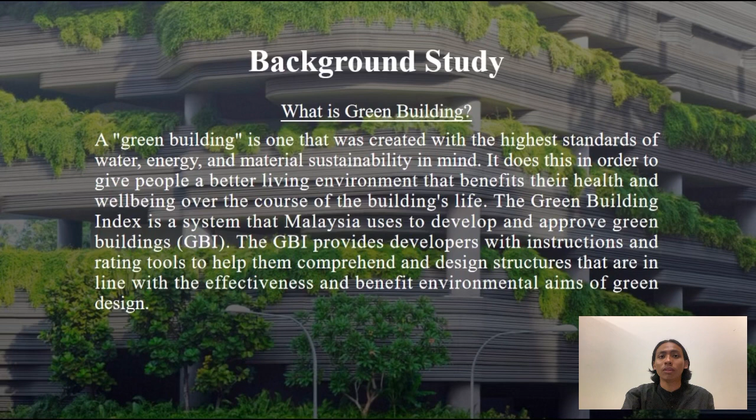The GBI provides developers with instructions and rating tools to help them comprehend and design structures that are in line with the effectiveness and environmental aims of green design. There are 6 key areas in the GBI rating system. There is energy efficiency, indoor environment quality, materials and resources, sustainable planning and management, water efficiency and innovation.

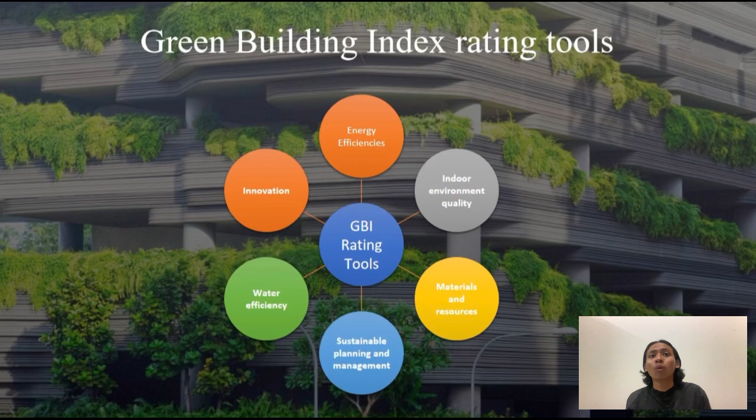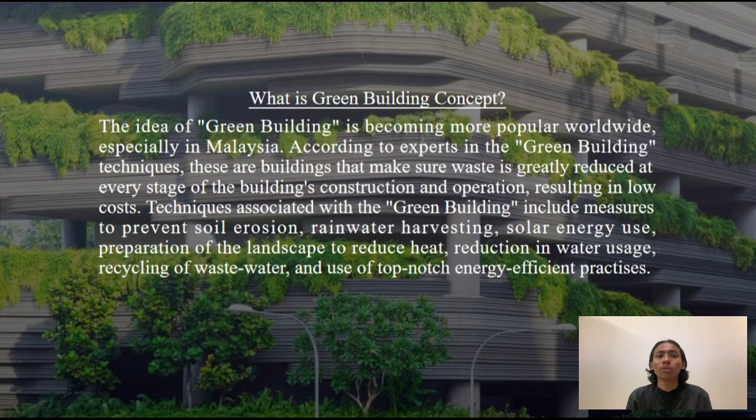What is green building concept? The idea of green building is becoming more popular worldwide, especially in Malaysia. According to experts in green building techniques, these are buildings that make sure waste is greatly reduced at every stage of the building's construction and operation, resulting in low costs. Techniques associated with green building include measures to prevent soil erosion, rainwater harvesting, solar energy use, preparation of the landscape to reduce heat, reduction in water usage, recycling of wastewater and use of top-notch energy efficient practices.

So for the problem statement, in developing nations like Malaysia, the same percentage is anticipated even without addressing the use of resources and energy during the construction phase. This is a great number of resources and energy used in the life cycle of a building. More than 6 million tons of rubbish have been produced, of which a quarter was produced in the Klang Valley alone, Malaysia's most affluent region. As a result, solid waste management is currently one of the country's largest environmental issues.

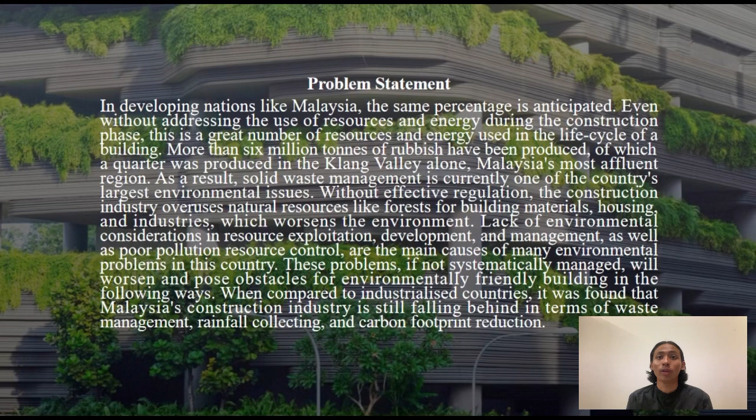Without effective regulations, the construction industry overuses natural resources like forests for building materials, housing, and industries, which worsens the environment. Lack of environmental consideration in resource exploitation, development, and management, as well as poor pollution resource control, are the main causes of many environmental problems in this country. These problems, if not systematically managed, will worsen and pose obstacles for environmentally friendly building in the following ways. When compared to industrialized countries, it was found that Malaysia's construction industry is still falling behind in terms of waste management, rainfall collecting, and carbon footprint reduction.

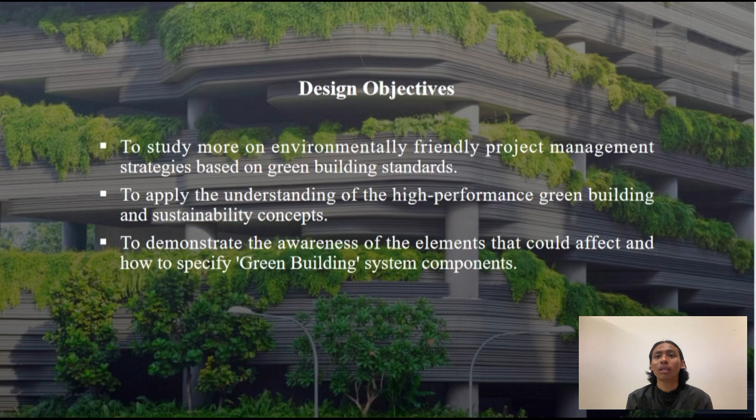For design objectives, there are 3, which is to study more on environmentally friendly project management strategies based on green building standards, to apply the understanding of the high performance green building and sustainability concepts, and to demonstrate the awareness of the elements that could affect and how to specify green building system components.

And for the design scope, this group project goal is to propose green building principles to non-residential structures, including mosques and retail establishments. As of our selection, we have chosen mosques as our non-residential structure to implement the green building principles. After that, the GBI Green Building Index rating tools will be used to evaluate it. The outcomes will be computed and examined.

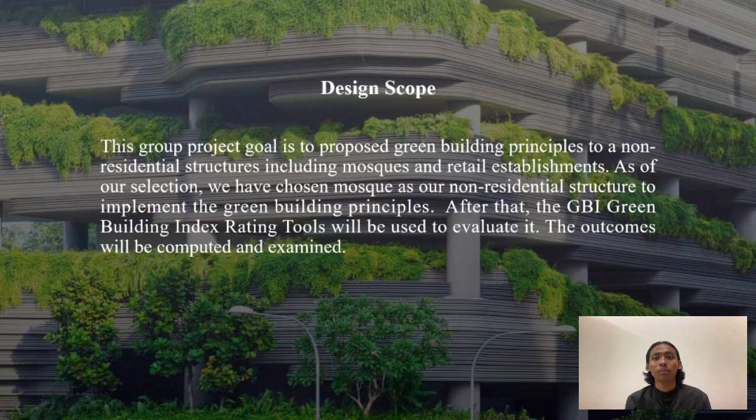So firstly I'm going to talk about the history of green technology. What is green technology? Green technology is renewable energy that has been around for thousands of years. For example, wind was used to carry ships over water as early as 7,000 years ago by the Egyptians. The primary sources of renewable energy in history were human labor, animal power, water power, wind and firewood.

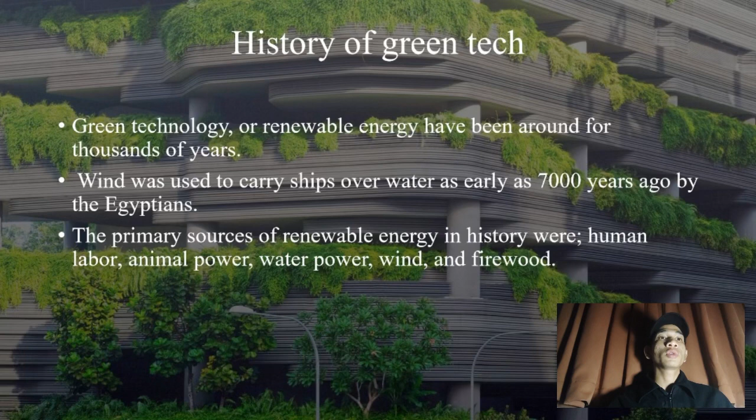So we bring green technology to Malaysia, which is our country. So the policies that align with national green technology. Firstly, we have the Paris Agreement under the United Nations Framework Convention on Climate Change in 2016. Then we have the national policy, National Green Technology Policy, NGTP. The third is the 11th Malaysia Plan strategies, from 2016 until 2020. And the last example is the Green Technology Master Plan (GTMP), which is planned from 2017 until 2030.

Next, the Green Building Index, which is GBI. GBI is a tool of green technology for buildings and construction. This is what we call a rating system for buildings, developed by PAM, which is Pertubuhan Akitek Malaysia / Malaysian Institute of Architects, and ACEM.

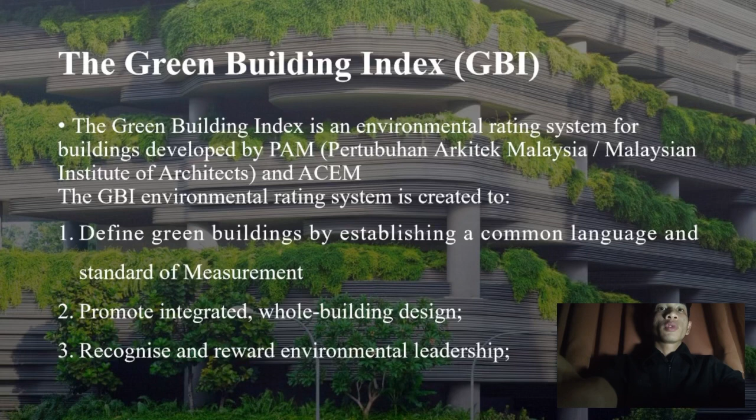I will talk about project information. This project is known as the Haji Ismail Mosque, which will be built at Jalan Astana 13/1, Puncak Alam Town, 42300 Kuala Selangor. It was built on land that was the site of a former mosque. It has an area of 3,564 square meters. This is the detail of the project.

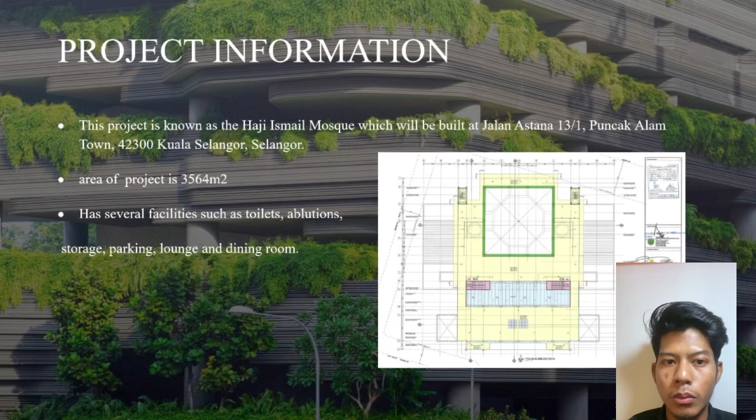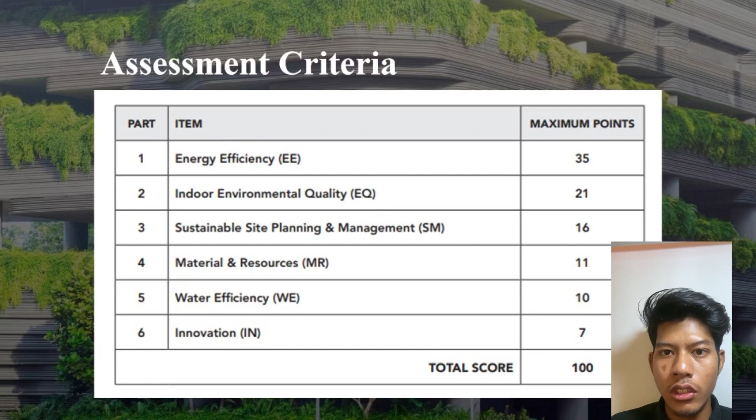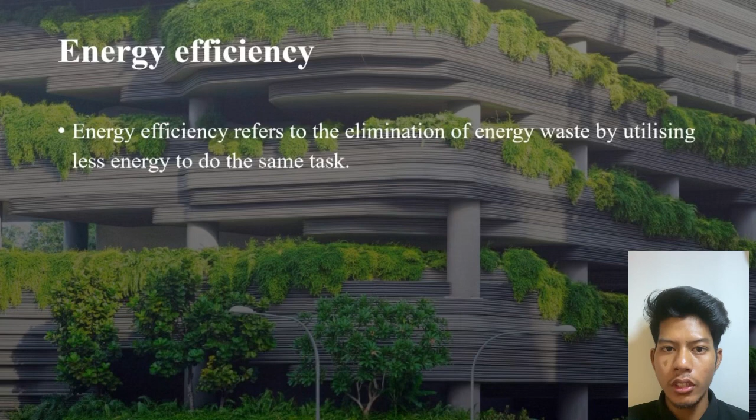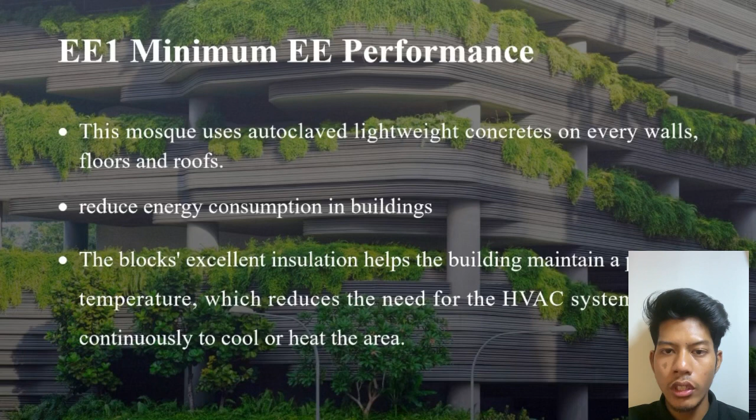Next, we proceed to lighting zoning. We provide individually switched lighting zones. The size of each individually switched lighting zone must not exceed 100 square meters for 90% of the NLA. The switches are clearly marked, simple for building occupants to use, and easy to access. Next, auto sensor lighting is applied to save electricity consumption, and we also added motion sensors in at least 25% of the NLA to detect any movement inside the mosque. This is intended to earn 3 points in lighting zoning.

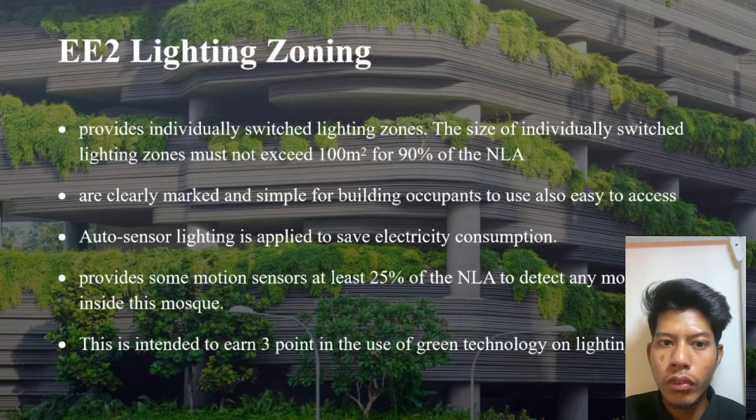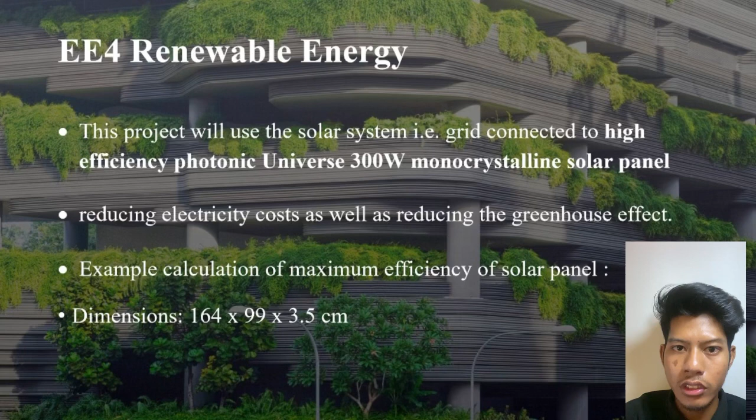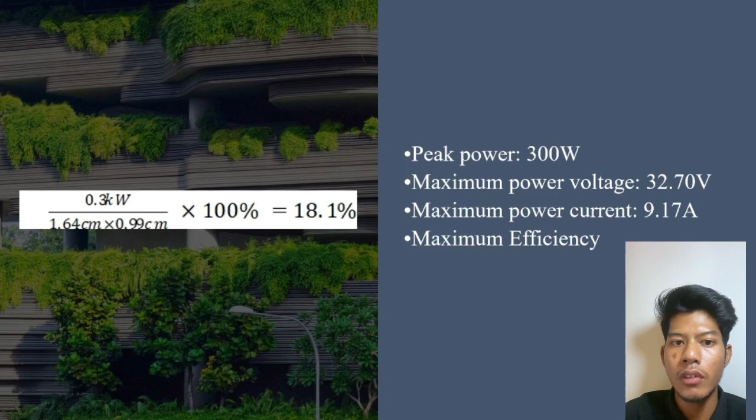Next, we proceed to EE4, which is renewable energy. This project will use a grid-connected solar system with high efficiency Photonic Universe 300 watt monocrystalline solar panels. It reduces electricity costs as well as the greenhouse effect. The example calculation is provided below: the length is 164 cm, width is 99 cm, and height is 3.5 cm. Peak power of the solar panel is 300 watts, maximum power voltage is 32.7 volts, maximum power current is 9.17 amperes. The maximum efficiency calculation is there, and the efficiency is 18.1%. This is equivalent to a 5 point score.

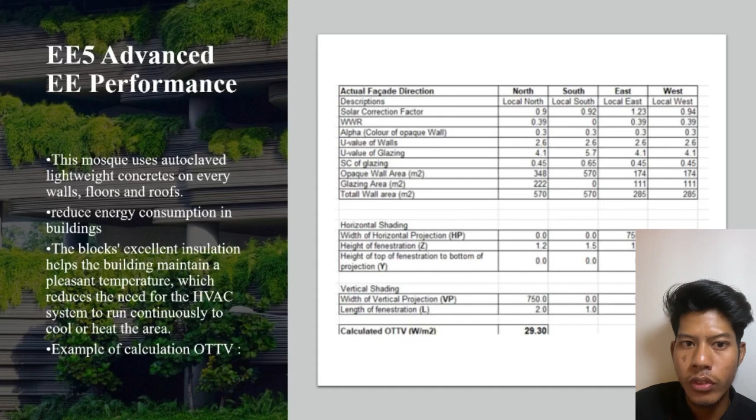Next, we move to EE5, which is advanced EE performance. We also use the method from EE1, which is lightweight concrete and lightweight concrete blocks. We also provide transparent glazing, which differs from opaque surfaces in that some of the energy from solar radiation passes directly to the interior environment. It lessens heat transfer across a portion of the building envelope, with insulating glass thickness from 3 to 10 mm.

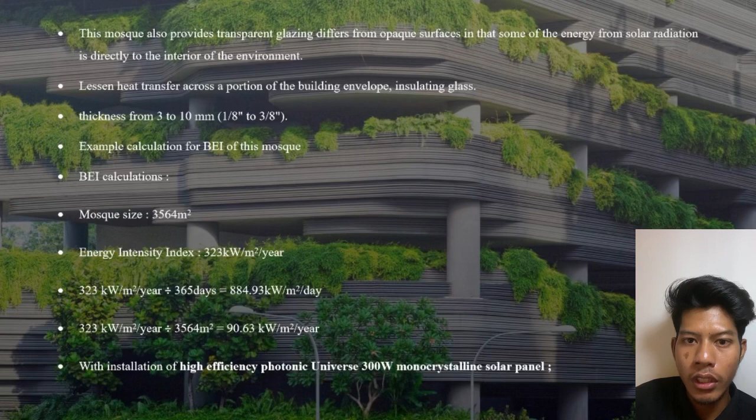This is the example calculation for the BEI of the mosque. We get 90.63 kWh per square meter per year. With installation of the high efficiency Photonic Universe 300 watt monocrystalline solar panels, we got a new BEI of 74.22 kWh per square meter per year. This is equivalent to 15 points, since the BEI is under 90 kWh per square meter per year.

For indoor air quality, or EQ, item EQ2, which is environmental tobacco smoke (ETS) control, we have displayed no smoking signage throughout the mosque area. From that, a score of 1 is achieved. For item EQ3, carbon dioxide monitoring and control, we have installed one carbon dioxide monitoring and control system sensor in the indoor main prayer hall to facilitate continuous monitoring and adjustment of outside air ventilation rates and ensure independent control of ventilation rates to maintain the carbon dioxide level lower than 1000 ppm, achieving a score of 1.

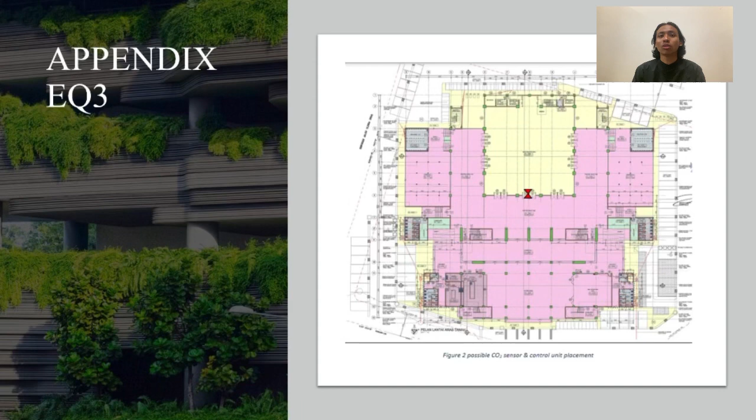For item EQ4, indoor air pollutants, we have a summary report of the implementation of low VOC materials in our project, and it all follows the needs of the assessment, which obtained us 2 points, the maximum score. For item EQ5, mold prevention, in the summary report, since our mosque is open air, the building is fully naturally ventilated, directly giving a score of 1 for the assessment.

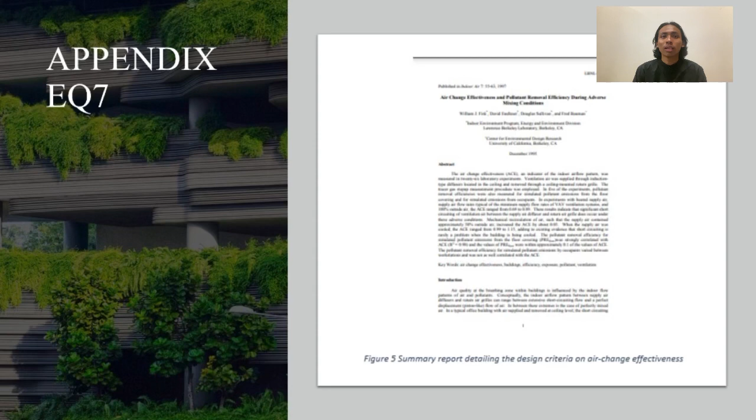For item EQ7, which is air change effectiveness, the score 1 is achieved from the summary report detailing the design criteria that provide effective delivery of clean air to reduce mixing with indoor pollutants in order to promote a healthy indoor environment, and met the criteria of at least 90% of the NLA.

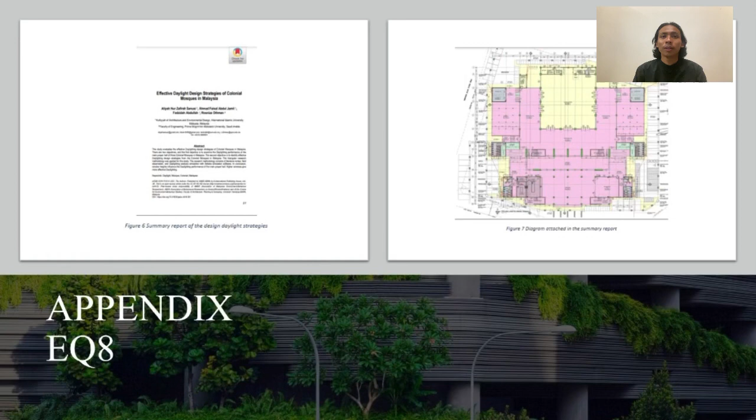For item EQ8, which is daylighting, the summary report of the design daylight strategy shows more than 50% of the NLA has a daylight factor in the range 1 to 3.5% as measured at the working plane at 800 mm from floor level, so the score 0.2 is achieved. For item EQ9, which is daylight glare control, window blinds are set to eliminate glare from all direct sun penetration and keep horizontal workspace lux level below 2000, giving us the score 1 for the point.

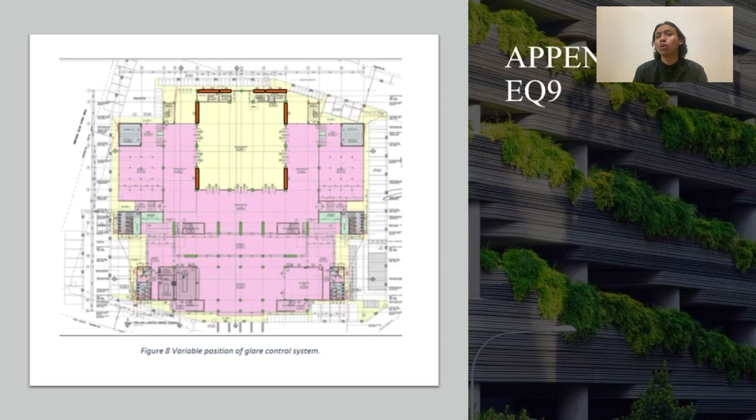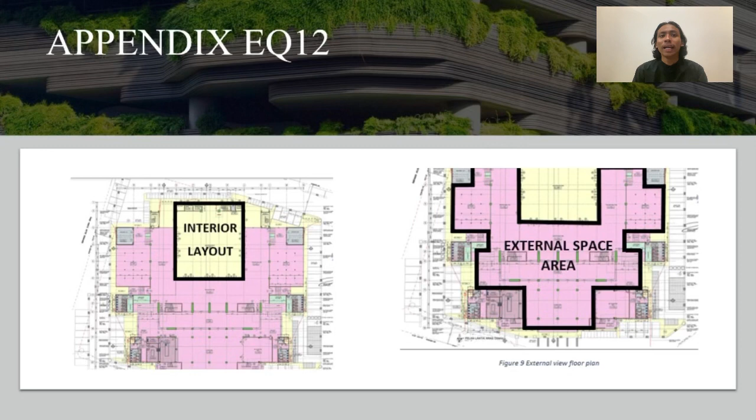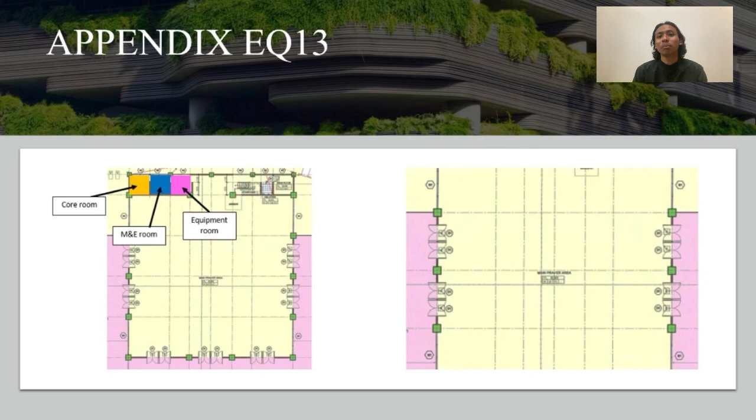And for EQ12, which is external views, the max point score of 2 is obtained from allowing long distance views for building occupants, minimizing eye strain, and the provision of visual connection to the outdoors is attainable with more than 75% of the NLA having a direct line of sight to vision glazing at a height of 1.2 meters from floor level. And the last item for EQ is EQ13, which is internal noise levels. This assessment score 1 is achieved by maintaining the internal noise at an appropriate level for 90% of the NLA.

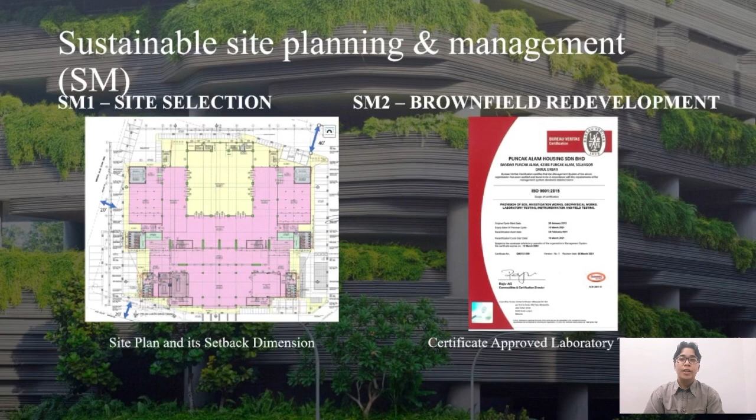Then, the second point is SM2, which is brownfield redevelopment. We develop mostly on an existing damaged site to reduce pressure on undeveloped land. The ISO certification below shows that our company has already been audited, especially in soil investigation and laboratory testing, and had approval that it meets the requirements and standards to proceed with new construction.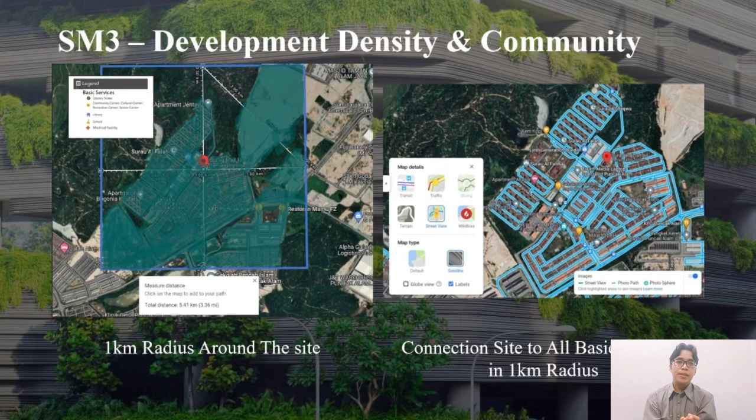For the next 2 points, our project will fulfill the SM3 criteria, which is development density and community connectivity. Our project is located at Puncak Alam, which is an urban area, so high density development will minimize opening up new greenfield. Below shows our site location within a 1 km radius, and 3/4 of the highlighted area is filled with existing buildings and ongoing projects. Within a 1 km radius there are 33 basic services near the site, and there is a pedestrian walkway connecting them. Now we already have 4 points.

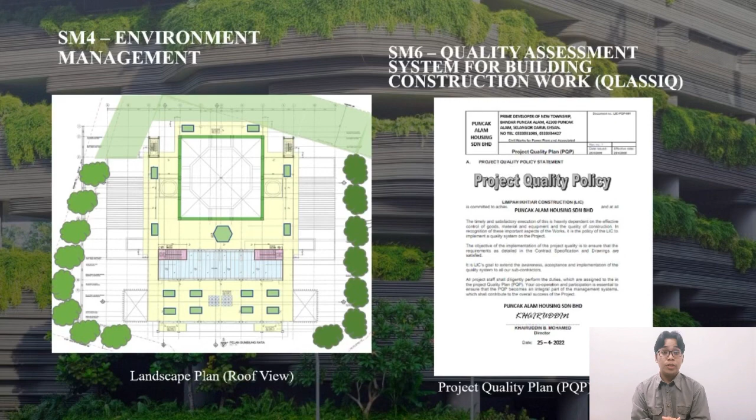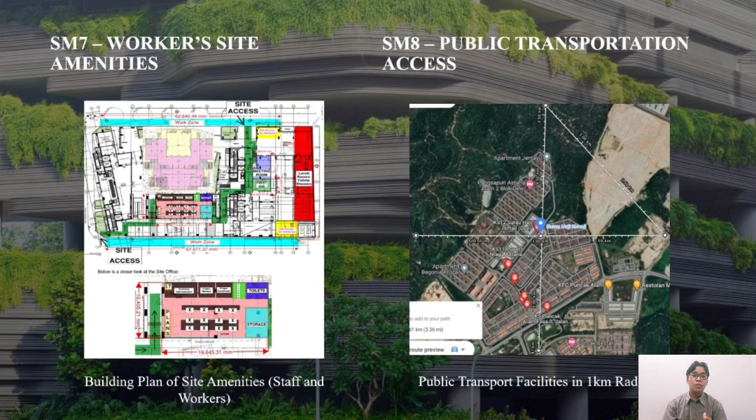Then at the right side is SM8, which is public transportation access. As we can see from the picture, there are a total of 10 bus stops within a 1 kilometer radius. This can reduce pollution from automobile use. This criteria is 1 point.

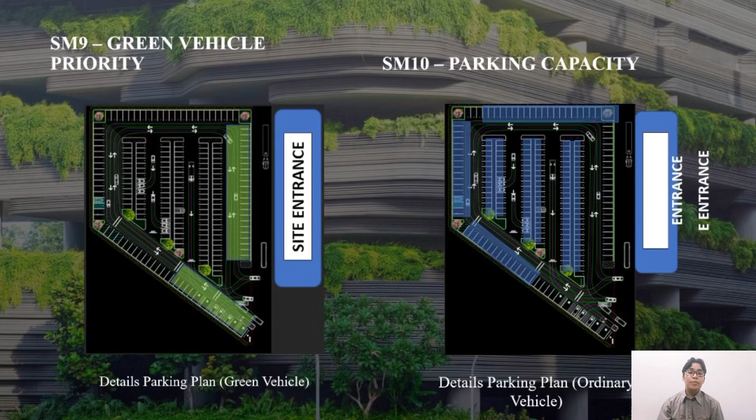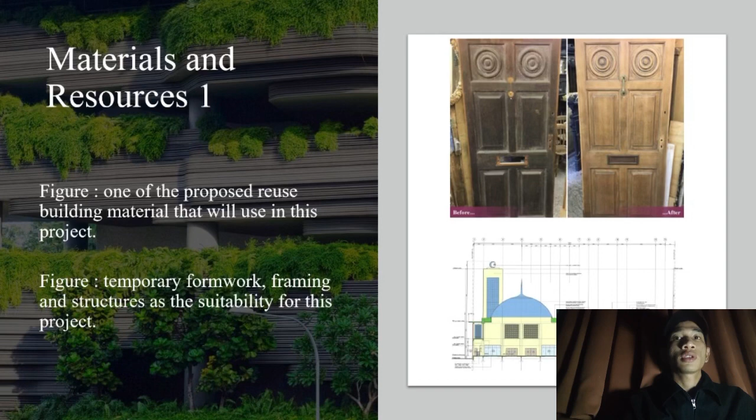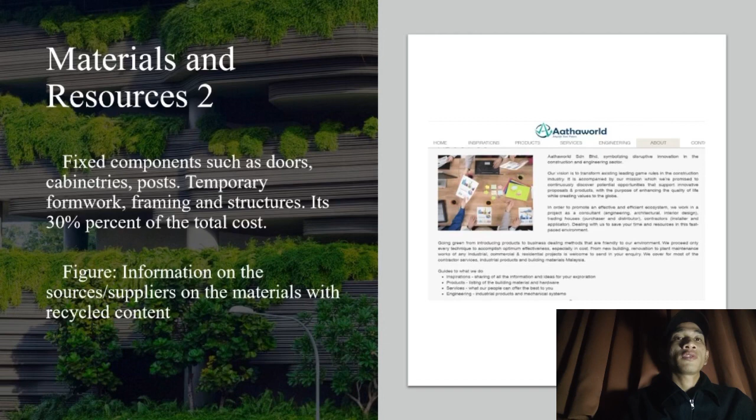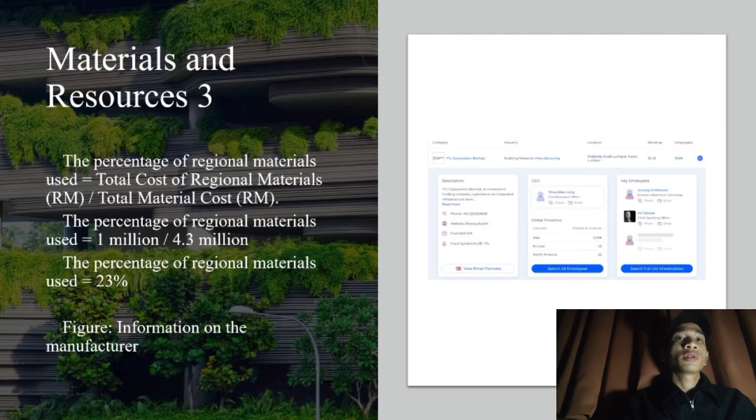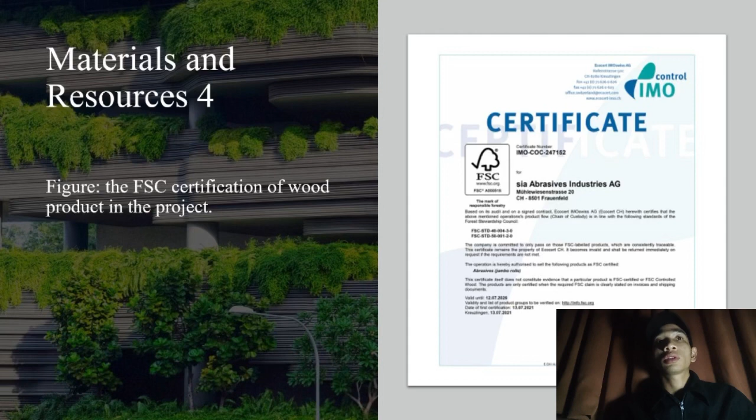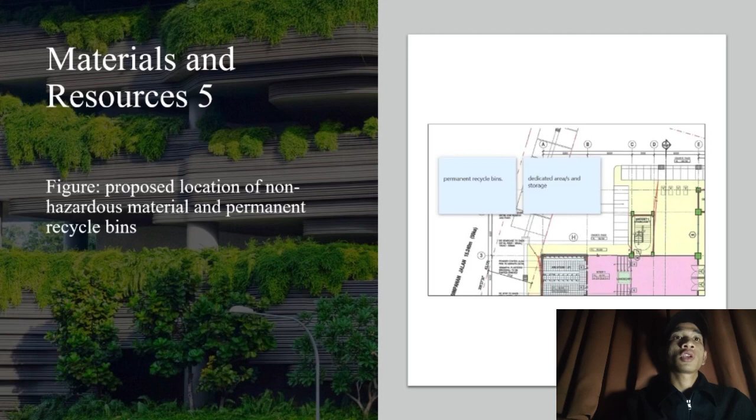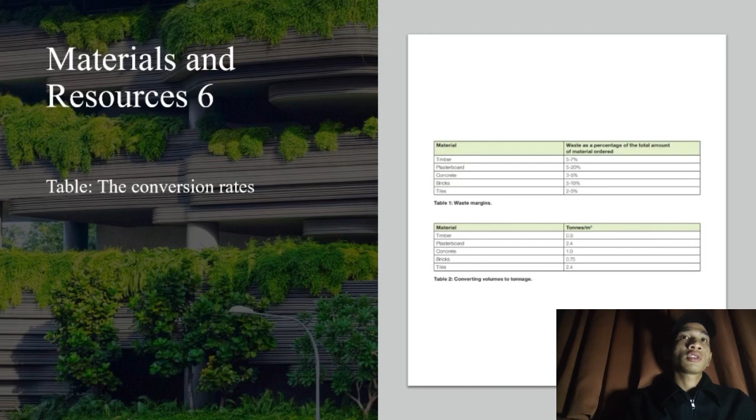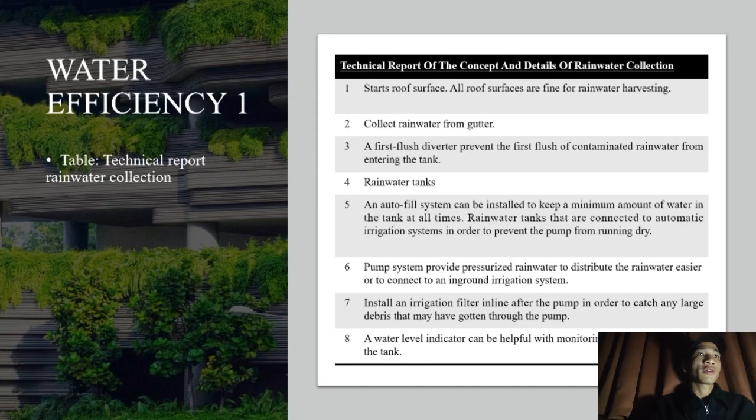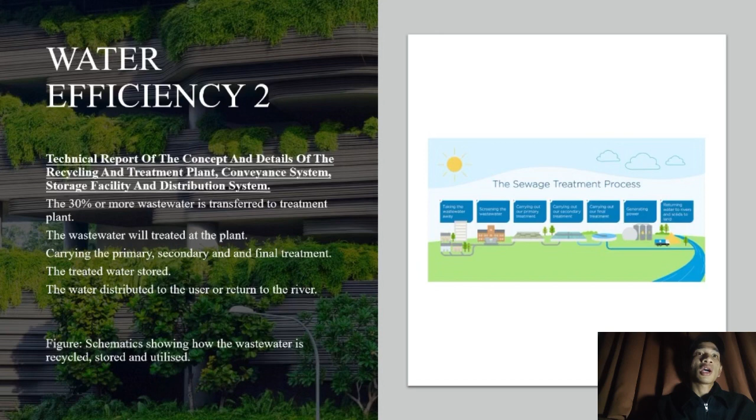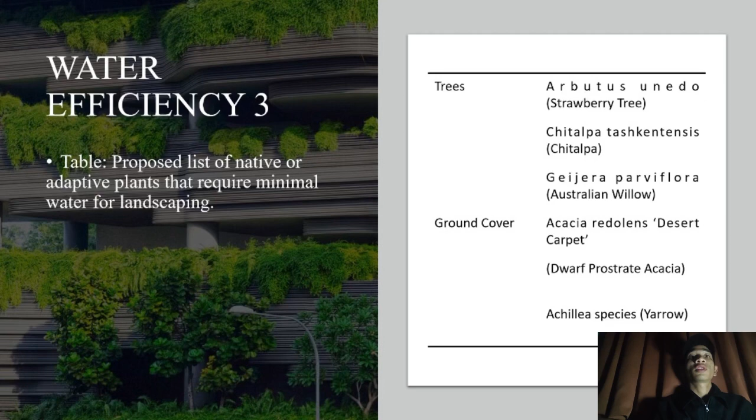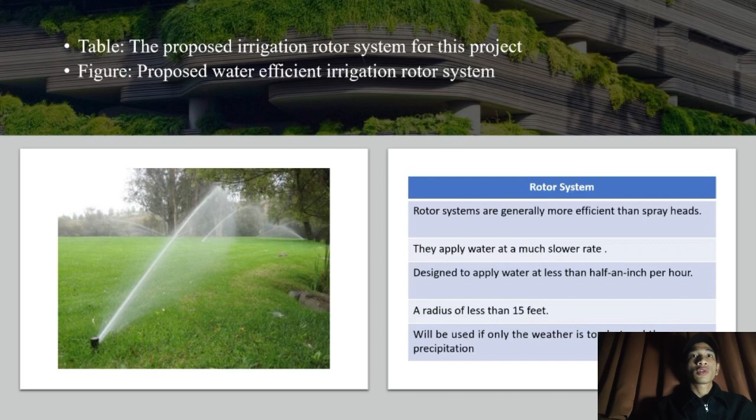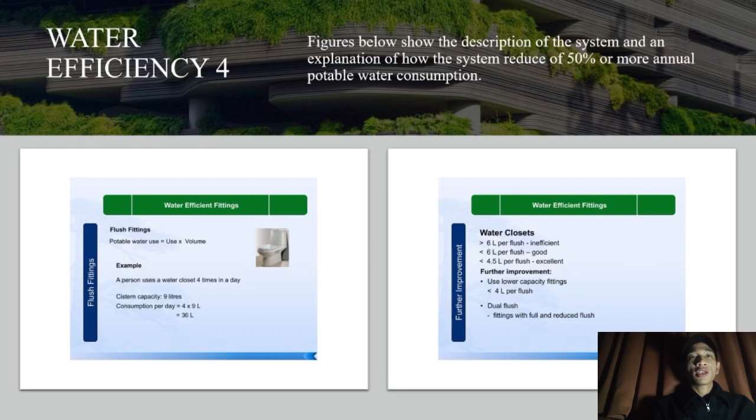Thank you. Okay, lastly, innovation. Innovation is the application of a concept in a way that results in the creation of a new product or service or enhances the provision of existing ones. For IN1 innovation, this must also provide the heat recovery system. It maintains a specific temperature in the habitable space by supplying conditioned air.

The goal of a heat recovery system is to transfer thermal energy between different fluids, solids or solid surfaces that are in thermal contact and at different temperatures. By recovering the waste heat, a recovery system can reduce the amount of energy needed to heat, cool and ventilate buildings. Its reduced energy use can make a significant contribution to a sustainable society by lowering greenhouse gas emissions.

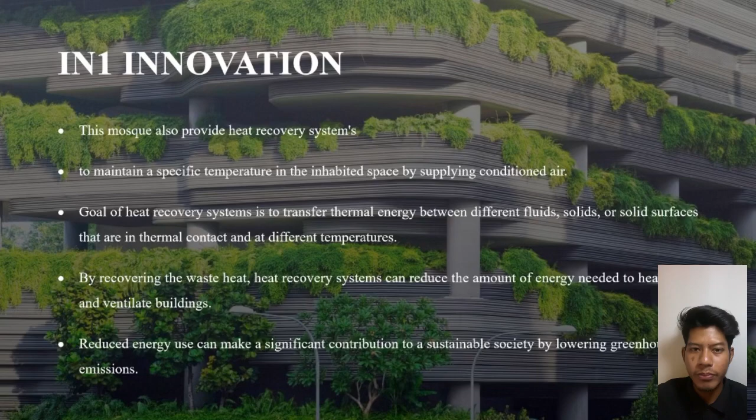So there are 6 criteria based on Green Building Index, which are energy efficiency, indoor environmental quality, sustainable site planning and management, material and resources, water efficiency and innovation. So the total cost for energy efficiency is 348,449 and 64 cents only. This cost includes materials such as solar panels, movement sensors and sensor lamps.

Then the cost for indoor environmental quality is 4,475 and 20 cents only. Based on the bill of quantity, we put up no smoking signboards, carbon dioxide detectors, and blinds to prevent heat from entering. Based on the bill of quantity, we need 303,830 only to complete the third criteria, which is sustainable planning and management.

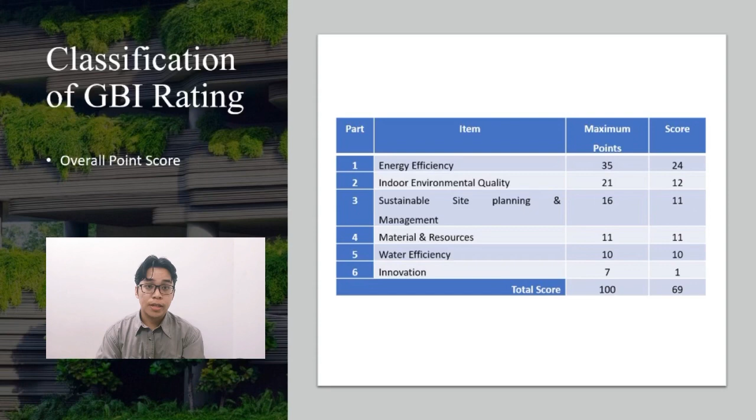Thank you. As we can see from the table, the overall point score for our project mosque based on Green Building Index rating 2 is 69. So our project is classified for silver rating 2. So, for the conclusion and recommendation, this study analyzed the green building rating system of non-residential new construction. So, the highlight is the difference in rating criteria and the weighting of criteria.

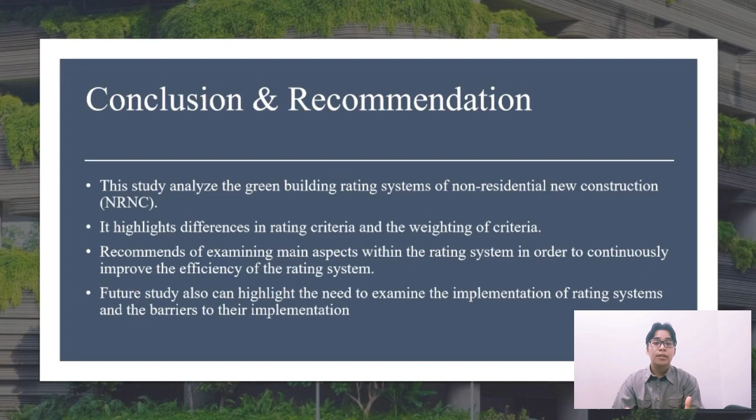For the recommendation, we recommend examining the main aspects within the rating system in order to continuously improve the efficiency of the rating system. Then for future study, they also can highlight the need to examine the implementation of the rating system and the barriers to their implementation.